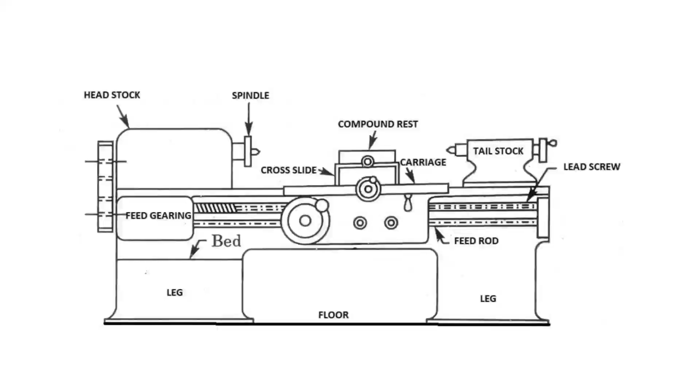Now the next thing is, usually the lathe bed is made up of cast iron alloyed with nickel and chromium. So now we know about the material used in manufacturing of the bed of lathe - it is cast iron alloyed with nickel and chromium. Nickel and chromium actually reduce the chances of corrosion. So this is your bed, we were talking about this thing.

Some important parts of the lathe machine - if you see, there are many important parts, but these are few of the more important parts which you have to describe in exam, or they can ask you two or three from all of these. But since we don't know which ones, you have to learn them all.

So the next is headstock. This is headstock, we'll see here. Headstock - what is it? We will see now. The headstock is a part of the lathe which serves as a housing for the driving pulley and back gears, provides bearing for the spindle of the machine, and keeps the spindle in alignment with the bed.

So what generally is a headstock? It is a housing provided on the lathe machine, and in that housing there are driving pulley and back gears, bearings, spindles, etc. So these are all the things which are in headstock.

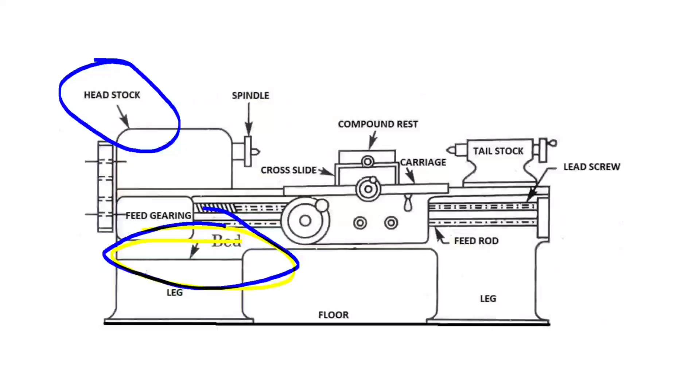Now see, if it is possible for you to see that on headstock the spindle is mounted. The first function I told you is to support the spindle. Second is to carry the driving mechanism of the workpiece - so here is the motor, that means it carries the driving mechanism of the workpiece.

Third is to give multiple speeds to the spindle. Now here, as I told you, here is the gearbox, so it can easily provide the multiple speeds to the spindle. Is it clear?

Now we are also discussing about the lathe parts, but there are also some important parts which are in the headstock. Now we will discuss that headstock consists of the following main parts. Let's see what are the main parts which are in the headstock.

So first is cone pulley and back gear. Second is main spindle, that is headstock spindle, which is shown here. Third is back gear and lever. Fourth is live center, and fifth is feed reverse lever. So these are the things which are inside the headstock - these are the parts of headstock.

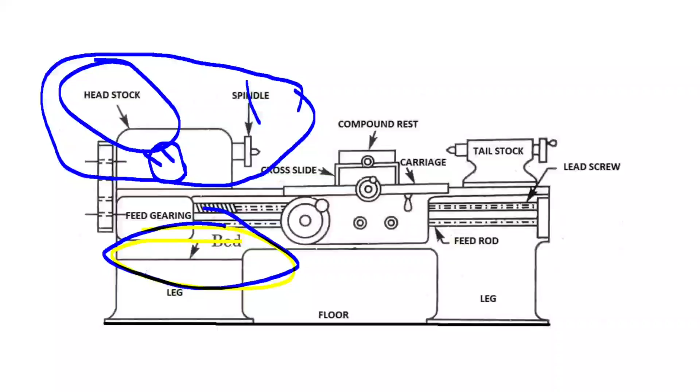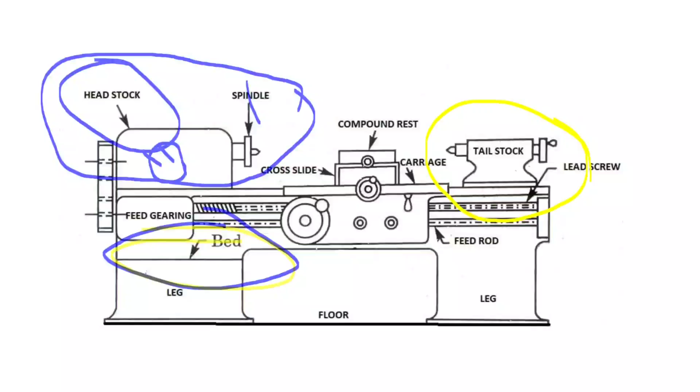Now let's see the next part, the tailstock, opposite to the headstock, as described before. Tailstock is also known as loose headstock or puppet head. There are two names of tailstock: loose headstock, and the second is puppet head.

Tailstock is situated at the right hand end of the bed and can be moved on the inner way of the bed. It is situated at the right end, whereas the headstock was situated at the left end of the bed.

The main function of the tailstock: there are three main functions, just as we discussed three main functions of the headstock. First is to support the other end of the workpiece when it is being machined between centers.

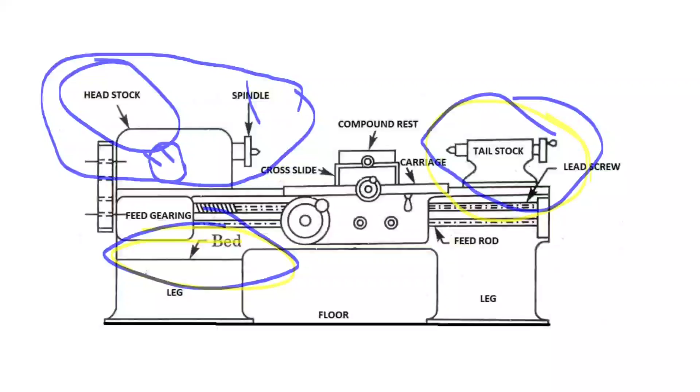The function has been explained, main parts of the tailstock have been discussed, and even the two other names given to the tailstock: loose headstock, and the other name is puppet head. These are the two names given to the tailstock, which we have discussed.

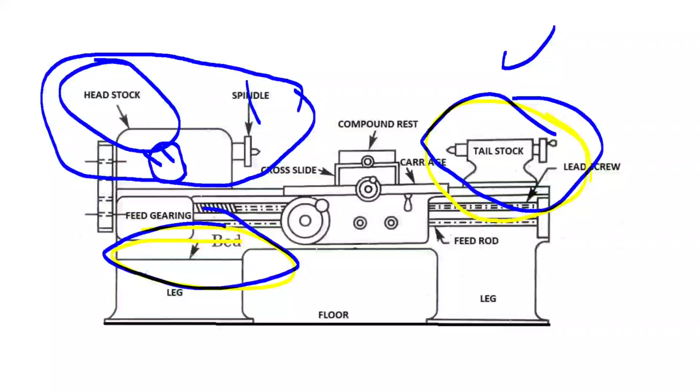Next part is your carriage. So where is the carriage? See, this part is your carriage. Let's see what is carriage, what are the types of carriage, and what is the function of the carriage now. So let's study about the carriage.

The lathe carriage is used for supporting, guiding and feeding the tool against the workpiece during the operation of the lathe. It consists of the following parts. So what is the function of the lathe carriage machine? It is used for supporting, guiding, and feeding the tool against the workpiece. So these are the three main functions of the carriage.

Now let's see the main parts of the carriage. First is saddle, second is cross slide, third is compound rest, fourth is tool post, and fifth is apron. We are going to discuss all these parts in detail, as it can be asked in exams. This topic is small in your textbook, so if they ask a question on carriage, they will definitely ask: what are the main parts of the carriage?

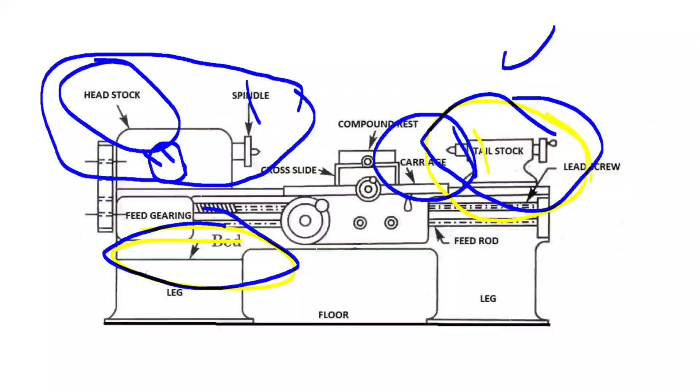Now next is our feed mechanism. What is feed mechanism? Before starting, just look at the diagram. I'll show you feed gearing and feed rod. We are going to need these terms in our further discussion, so remember feed gearing and feed rod.

Let's see what is feed mechanism. The movement of the tool relative to the workpiece is known as feed. The lathe tool can have three types of feed: first is longitudinal, second is cross, and third is angular. These three types of feed can be there on a lathe.

Longitudinal feed is obtained by movement of the carriage. Cross feed is obtained by operation of the feed screw, whereas angular feed is obtained by swiveling a compound rest. Longitudinal and cross feed are both hand and power operated. Angular feed is only hand operated.

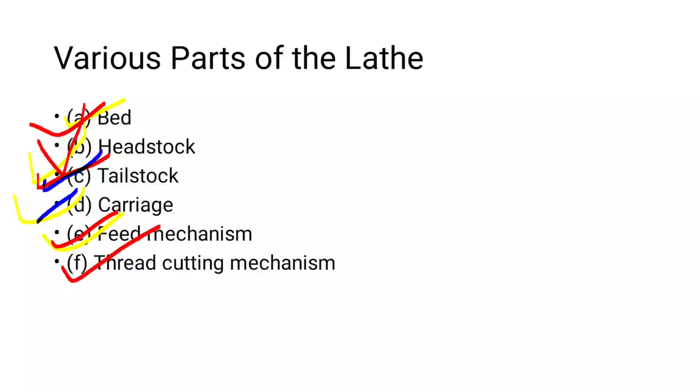What is it? It is thread cutting mechanism. In thread cutting mechanism, the half nut mechanism makes the carriage engage or disengage with the lead screw. It uses the rotation of the lead screw to move the tool along the workpiece to produce a screw thread.

It consists of a pair of half nuts which are capable of moving in or out of mesh with the lead screw. The two halves of the nut are connected in the cam slot in a circular disc with the help of two pins. When the disc is rotated by the hand lever attached to it, the pins are guided in the cam slot. These pins serve to open or close the split nuts, and hence engage or disengage with the lead screw.

Closing the half nut causes the carriage to move through a fixed distance for each revolution of the spindle. The split nut or half nut is used only for thread cutting operations. We are going to discuss half nut and split nut in further detail.

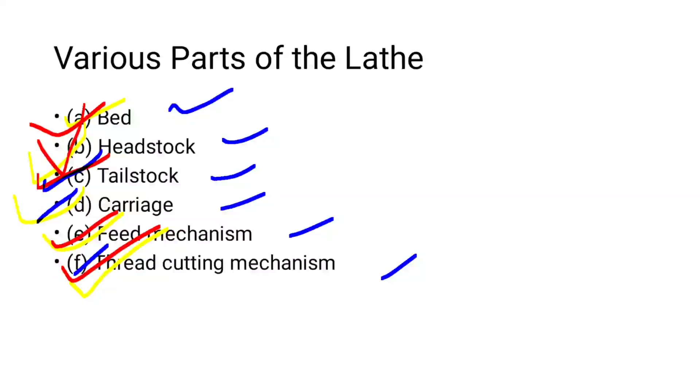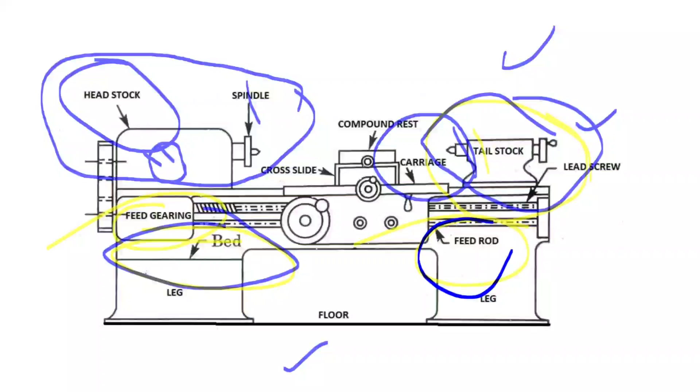Now the next thing is you have to draw this diagram. This is the easiest diagram of the lathe machine which you can draw and explain to your examiner. You always have to remember these components, which I have marked in yellow and blue, are the most important components, and you have to draw them in the diagram and name them. So this was all the topic for today. Thank you.